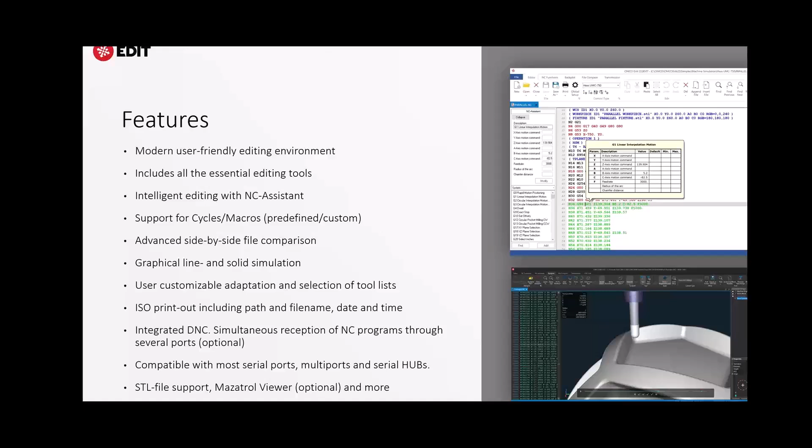Some of the new and improved features that have happened over the last couple of releases, and then the 24 release. Again, quite a large list here, but some of the key things: support for Mill-Turn C+Y axis functionality. You have the ability to download some machines if you're looking at getting into the machine sim aspect. Quite a few new and improved features in there.

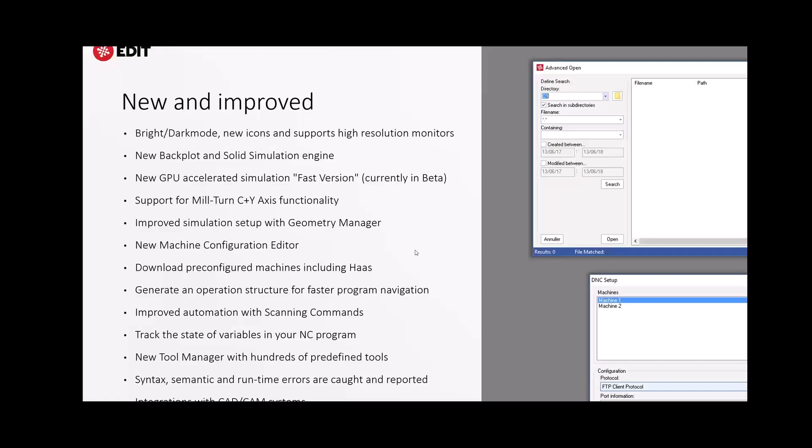Just wanted to touch on machine simulation. I guess before I get into this too far, this is obviously something you can do with CIMCO Edit, but CIMCO Edit by itself is essentially the stepping stone or the backbone of everything to do with CIMCO. If you're a customer already utilizing CIMCO DNC as an example, you would have CIMCO Edit. So if I was to liken it to an example, it would be like Mastercam Design. Mastercam Design comes with everything. It's the backbone. If you have Mastercam Mill, you have Mastercam Design. So CIMCO Edit works like that. Everything is built on top of it. The DNC utilizes CIMCO Edit and the CIMCO Edit interface, and DNC runs through that. Same thing with NC Base and MDM. Everything is built off of the CIMCO Edit Pro.

So one of the things Andre is going to dive into here is the ability to do machine simulation. He'll touch on that. There's an option to do the CIMCO machine simulation with NCI and also with G-code.

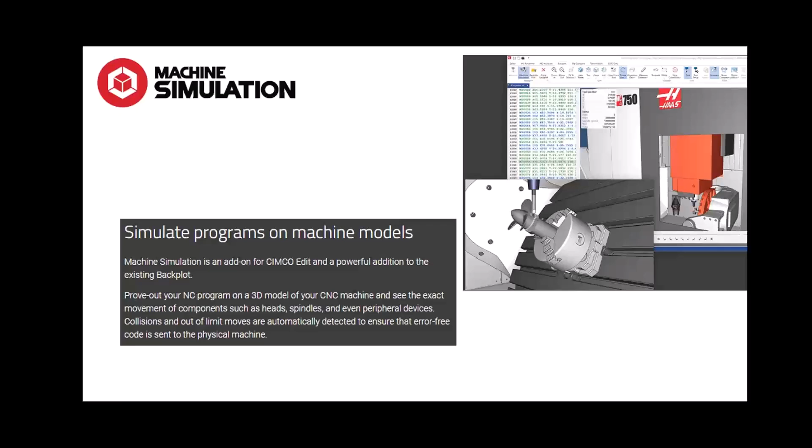The last thing Andre is going to touch on is CIMCO Edit Verify. One way to explain it is it's like Verify that you're used to in Mastercam, but it's outside of it. It runs inside of its own little standalone. If you've got really in-depth programs with lots of operations, CIMCO Verify can move pretty quickly, and Andre will have an example of that. The example on the screen is an 8-cavity mold, quite in-depth, and you can verify this to completion in, say, 5 to 10 seconds, where Mastercam can sometimes take a little longer. You still get the same result. So depending on your requirements, CIMCO Edit Verify might be of interest.

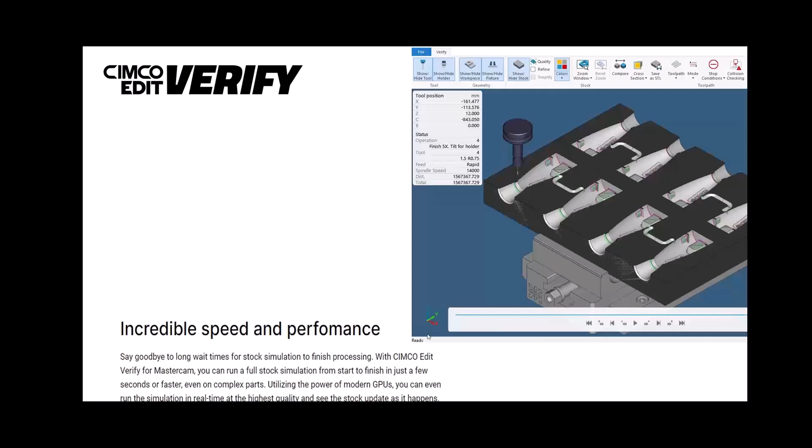There we go. Can you confirm you're seeing my CIMCO Edit 2022 screen right now? Yes, I see it, you're looking good. All right, great. For all of you guys that already use CIMCO Edit as your editor of choice when generating code from Mastercam, you'll be familiar with this. I'm using the dark theme or dark mode here, but as you can see, those are the exact same tabs you currently have.

So there's only the editor, NC function, file compare, and the regular single machine transmission that you can have in here. Now I'm going to close this up and start the CIMCO Edit Pro version. You'll notice I'm running the 2024 version, and you'll notice a few more tabs on top. As Lee mentioned earlier, the database tab is part of the NC Base integration with CIMCO Edit, which is an NC file database.

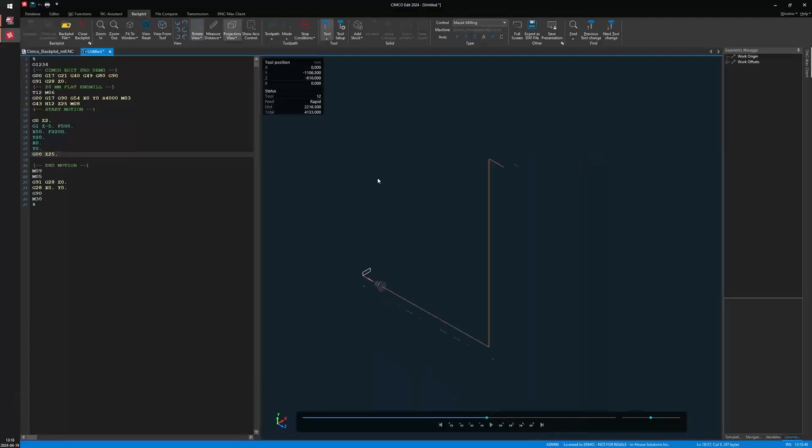From the backplot screen here, I'll be able to just pick what kind of controller or machine I'm dealing with. So I'm going to pull up this horizontal machine, and I'm just going to look at the backplot right now. So I have, well, it made it horizontal anyway.

So I have this simulation here that I can have going. I can step through it manually, or I can just run it from here with the control, and it's looking at the G-code simulation, as you can see.

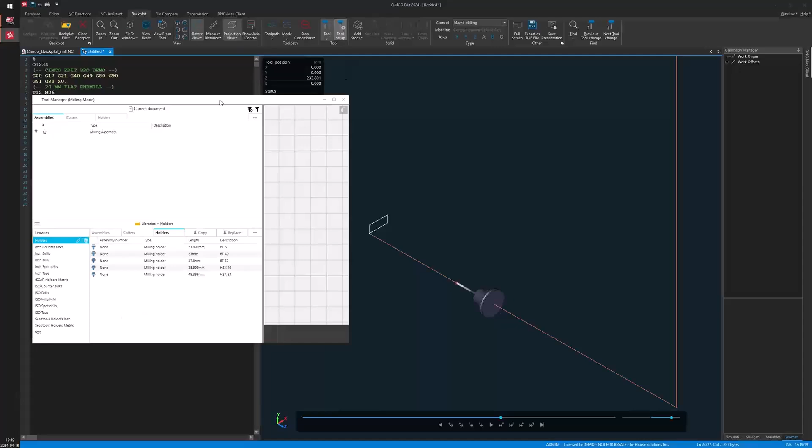You also have the option to define your own tool libraries within the CIMCO Edit interface. There's a nice screen here where you can define either your holder or your cutters. So this is just the holder, and you can have your different cutters, then create some assemblies as well for both milling and turning tools if needed.

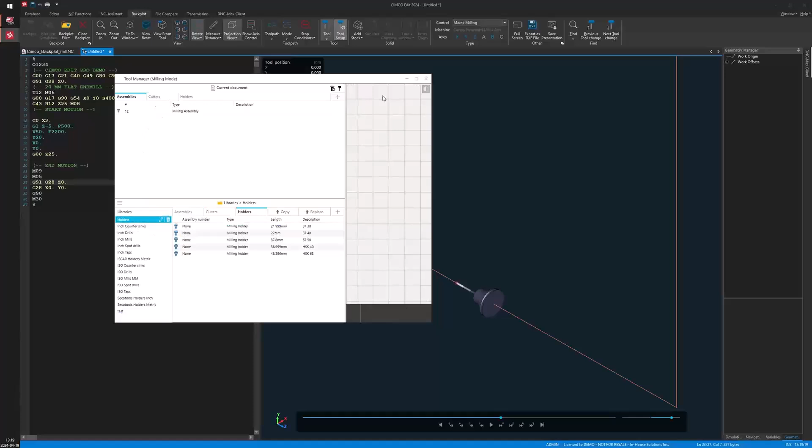Other things that are really interesting, for example, within the NC function: the ones you currently have in the OEM or Mastercam embedded CIMCO version stop right here. You have the options for adding or removing block numbers, adding spaces, and stuff like that.

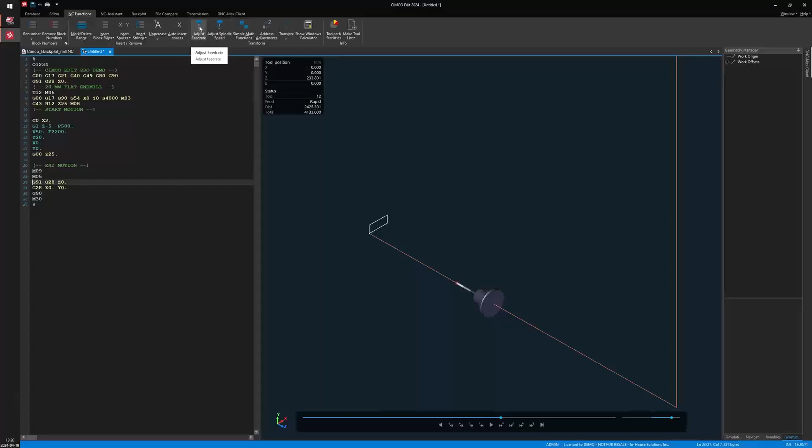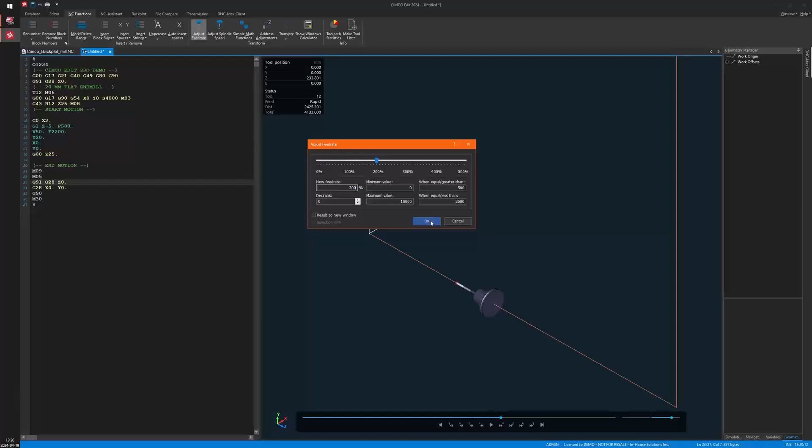But you have all these new features in the Pro version which allow you to modify feed rate. So you can say, well, if the feed rate is greater than 500, put it... adjust these values when it's less than 2500, increase it by 200%. So if I say OK, it should increase both my values 2 times, and this will reflect right away in the simulation as well.

Other things we can do here: we can do the same thing with the spindle speed, and we can add simple math functions.

So you can say, for example, take all the X values and add 25 to it. So you can just say, okay, I add 25 to all the X values. I had 25, I add 25, I'm now at X50. So it just increased it on this one.

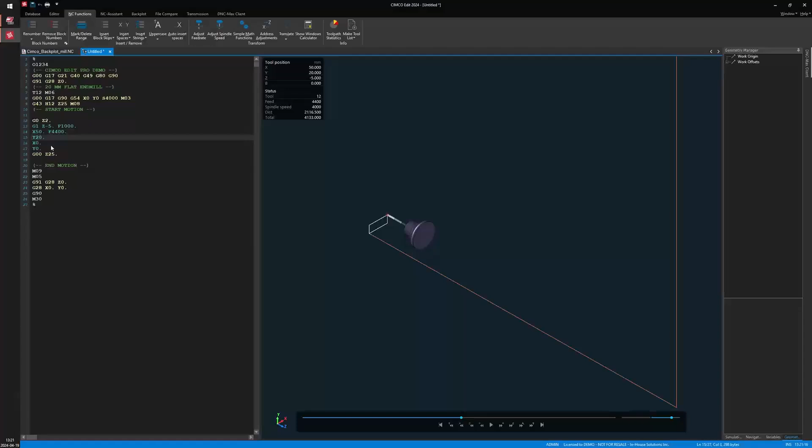Something else that you can do, you can flip values. So you can say, for example, I want this rectangle to be rotated 90 degrees. I can say swap X for Y's, and then just say okay. Now it's all flipped throughout the whole file. So it's just simple stuff that we can do.

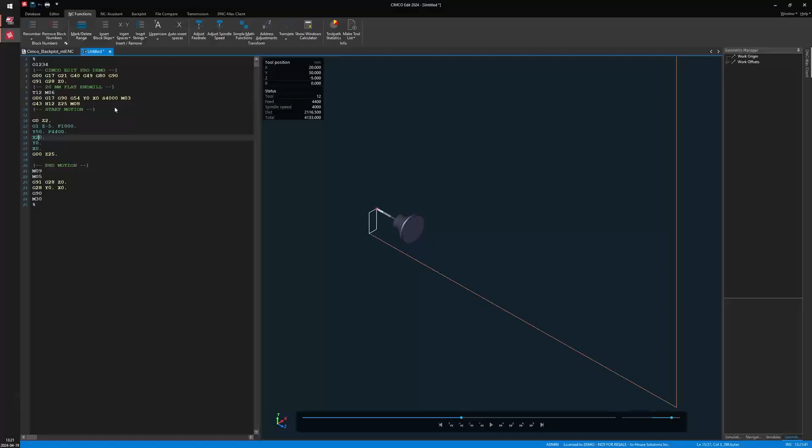We can also make some translations. So I could say shift everything here by 50 millimeters in X and 10 millimeters in Y. So now everything has been translated from my initial position.

This is just a shortcut to show the Windows calculator. So it's just gonna pop up on my other screen, for easy calculator access. You also have this toolpath statistic that is pretty interesting.

Well, maybe not on this file because it's so easy, but you can get the minimum and maximum Z values from the file, and then you get the estimated running time for all these operations. And you can also have it make a tool list.

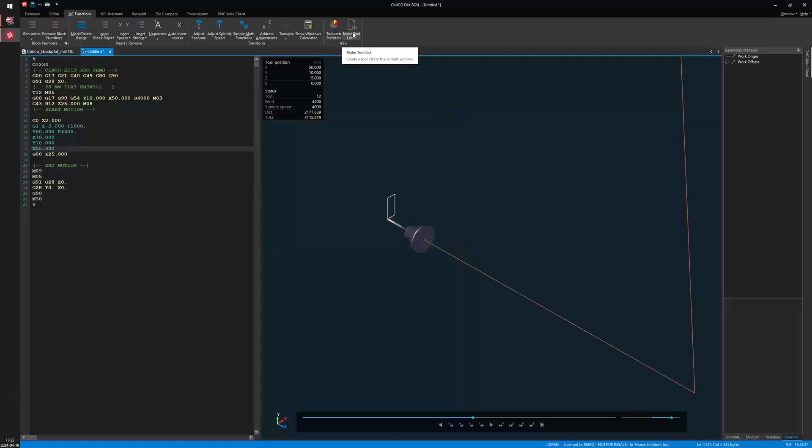So for example, if I go back to this file, which is a bit longer, if I make my toolpath statistic here, I'll get the information for all the tools individually, and I also have my tool list that can be extracted from the actual tool that we have here in the current file. So that's for the NC function option that we have here.

Let me just close this here. Something else that we can see from the NC Assistant page is the ability to set up what we call the multi-channel view. Whenever you have a machine that requires 2 different streams of code, whether they are embedded in the same file, for example, if you have a Mazak Integrex with upper and lower turret, these machines have M codes that specify whether you're working on the upper or lower turret, and they are embedded into the same file, but we can split them up and see how the process is going to be happening.

Or if you have them into separate files, like this one here, it's a sample from a Nakamura JX250, which has 3 turrets, so 1 B-axis head and 2 lower turrets. So what I want to do is just set this up, making sure I'm using the proper channel delimitation, so it's going to be using the M100-something with a P-value for the sync code.

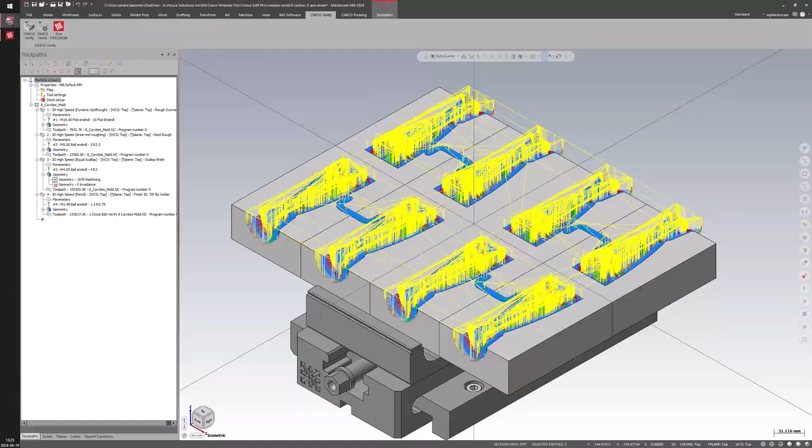So let's jump back now into a bit more advanced stuff. I'm gonna jump into Mastercam here and show you what CIMCO has called the CIMCO Verify or CIMCO Edit plugin. So this here is to show you the CIMCO Verify. That's the same picture that Lee had in the PowerPoint.

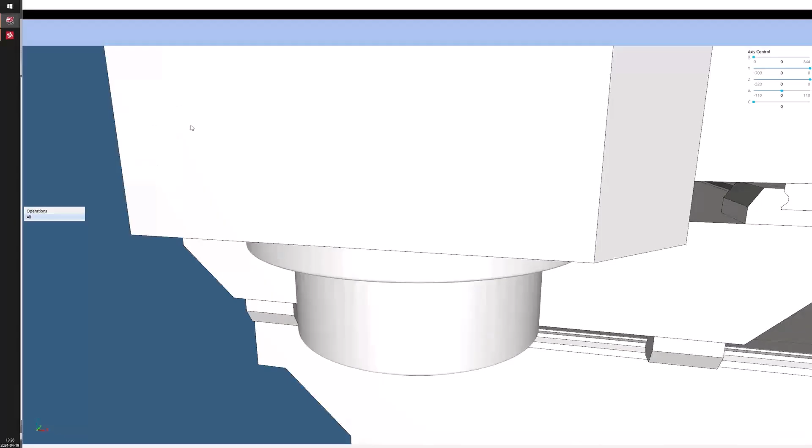So it's that 8-cavity file. Those of you who know Mastercam well enough know that if you look at those numbers here, those are the NCI file size for each of these operations. This is pretty heavy, there's a lot of points to generate the code and to simulate, and running that into Mastercam would take a really, really long time. But if we just go into CIMCO Verify, it's going to pop up in here, a dedicated interface.

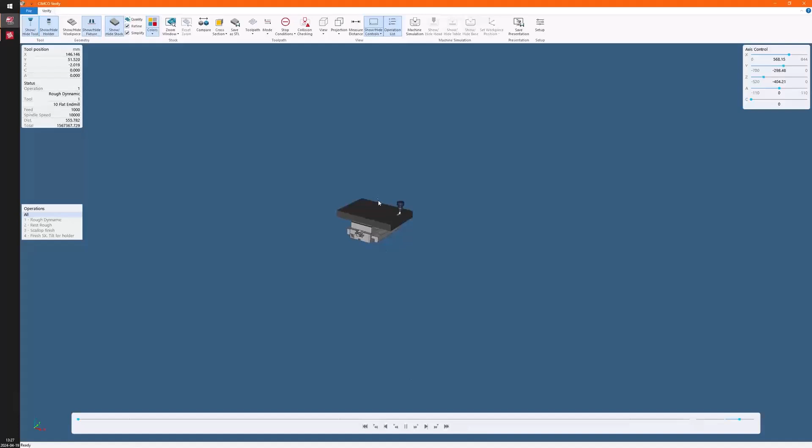We have this configured with the machine, so we don't have to run the machine simulation, but if we want, we can just turn it on or off and start the simulation. You have the regular play, but if you want, we can pause this and jump right to the end, and we're done. It's really fast, really clean.

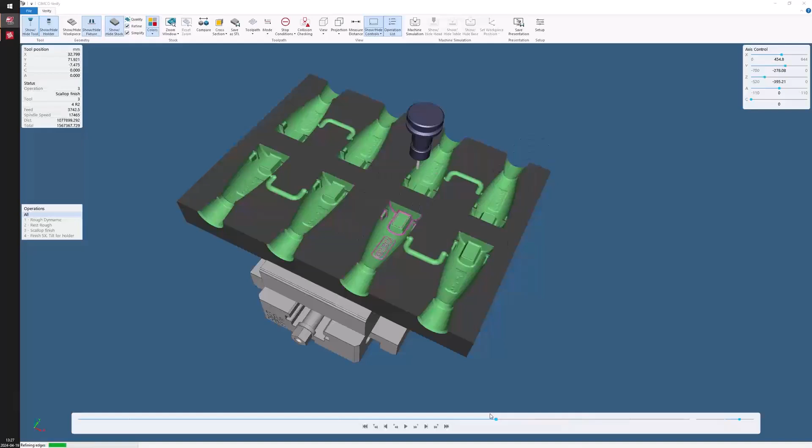What's also interesting is that I can scroll in and scroll back, and if I go back into a deeper stage of the operation, it will bring back material as I go. So I can go back and forth as long as I want, and it will bring back or remove material depending on which direction I'm going.

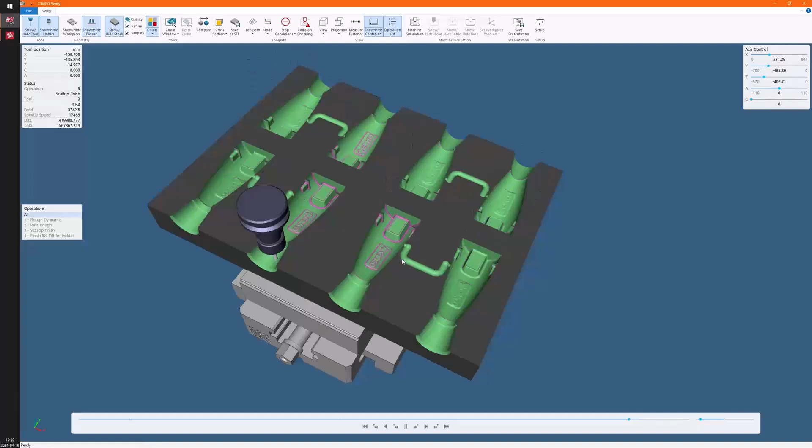You have the same option here. This is my simulation speed, but I can also go in reverse. So if I just set it to go reverse, you'll see material coming back in as we go. It's pretty interesting.

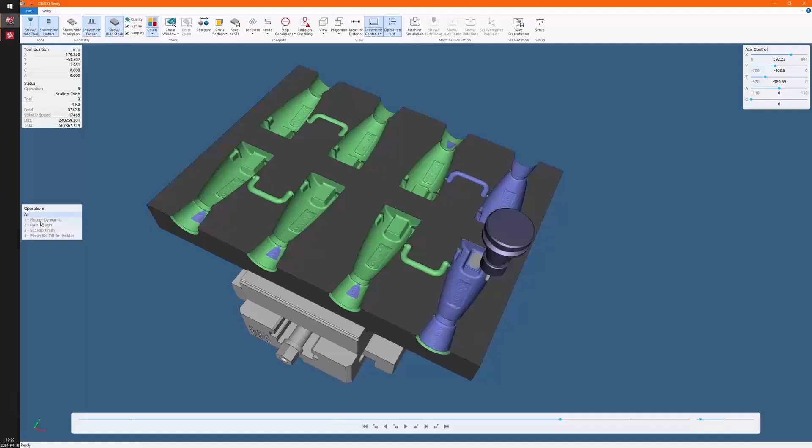Also, what's neat is you have these boxes of information showing the position of the tool, status of the operation, and some information gathered from Mastercam. But you also have this summary or list of operations, and you can jump right to the beginning of each one and see the result updating live, ready to run at that sequence.

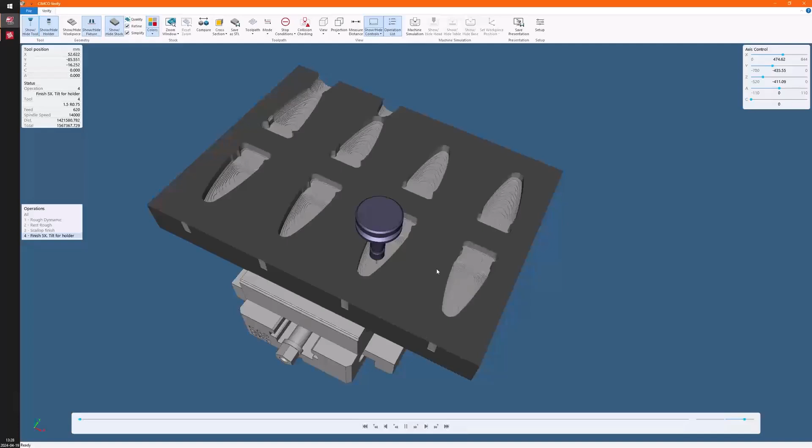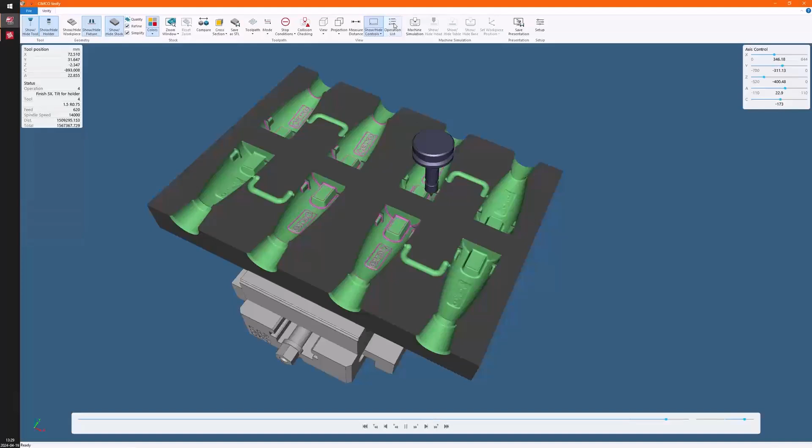It's ready to go, jumping in. Again, you have options to show or not show things like the tool and color coding, so you can control all of this. You can choose to see the operation list or not, and you have the axis control here which you can play with.

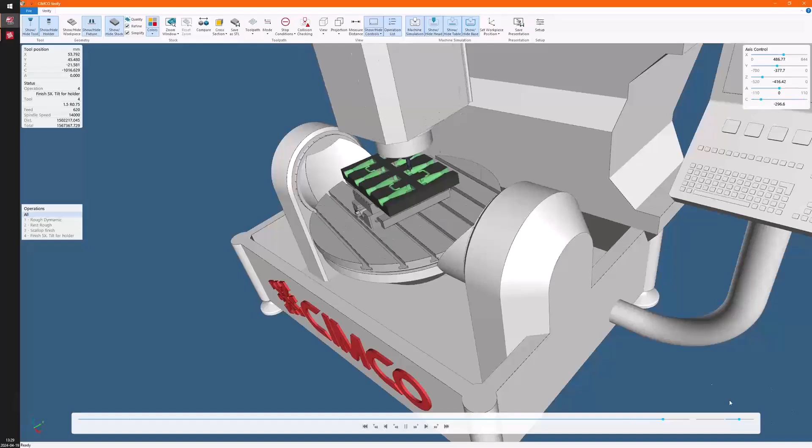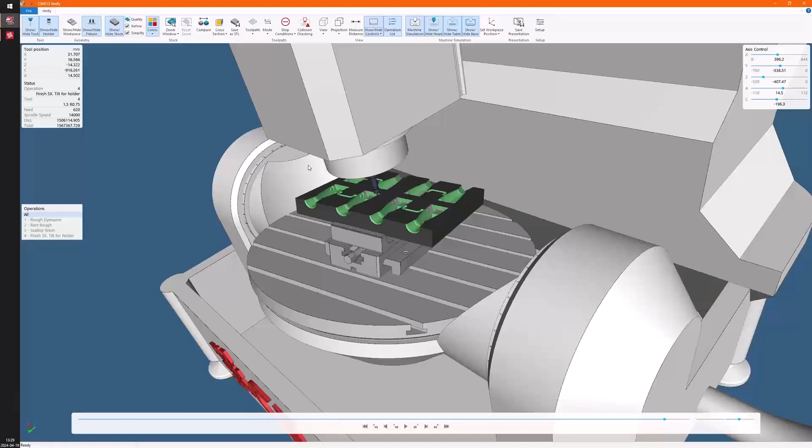If I'm running the simulation, going fast a bit on a 5-axis machining sequence, there you go. It's definitely much faster than what we have in Mastercam right now. So for huge files, mainly people doing intense 5-axis machining and mold makers as well, it's a pretty good, interesting option to consider.

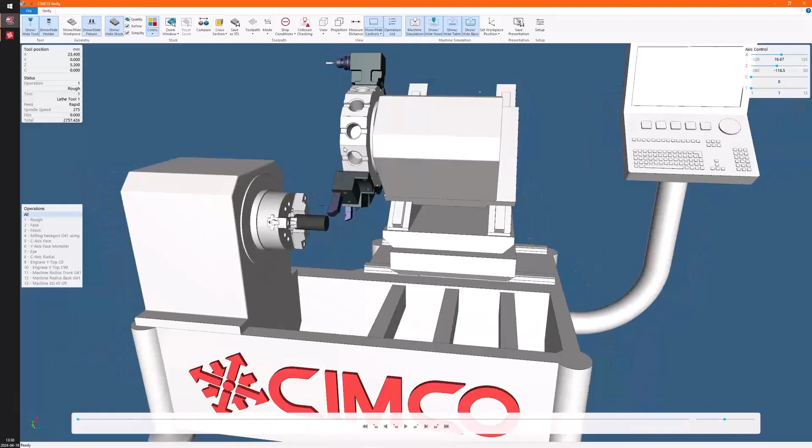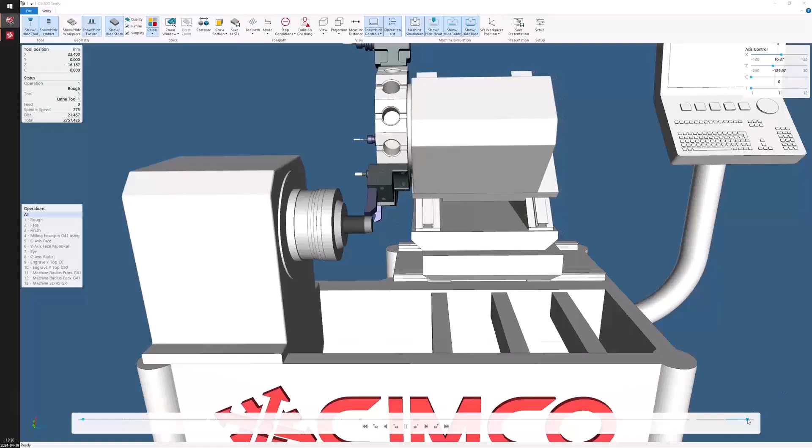If I turn this down right now, I'm going to look at a different file. So for example, I can pull this one out, just to let you know that CIMCO Verify and Machine Simulation also supports turning machines. It's going to extract the information from Mastercam. Regarding tooling, locators had been previously set in some part of the interface, but it's the same process as the milling. You'll see the simulation going on with milling, interpolation.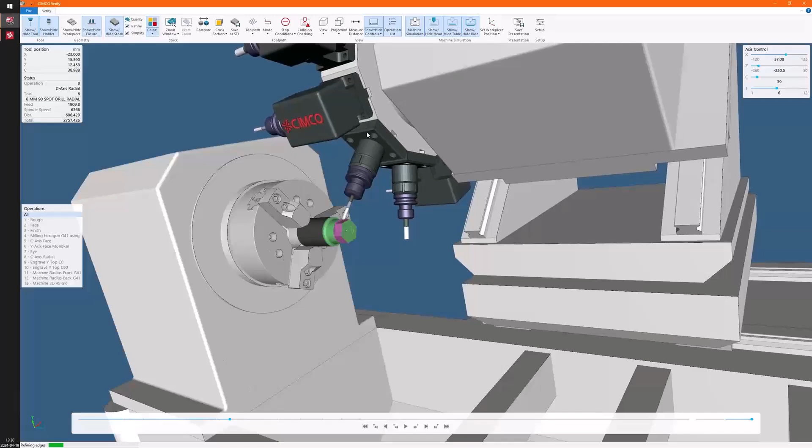Engraving, and the same feature as before - if I go back, I'll see material coming back on the part right away. So that's another feature of that.

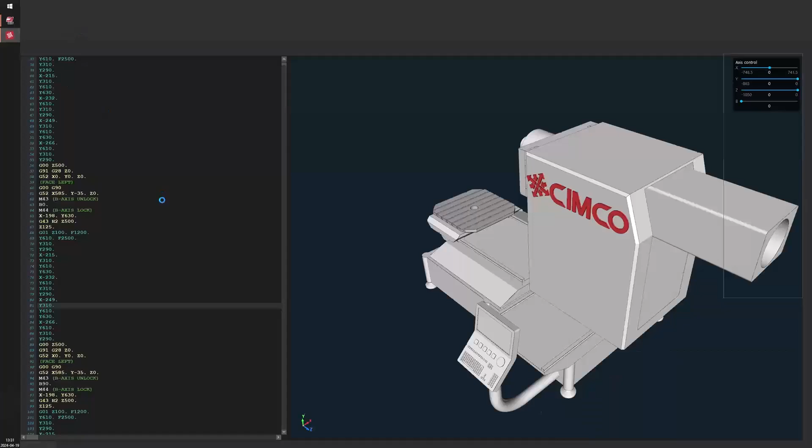Last sample I have here, using a different option from the plugin, is I'm going to run the CIMCO Edit. Just so we're clear, I'll show you this quickly - this is all good, so I'll turn it off and have that plugin run through. What this will do is automatically post the code with the Mastercam post we've selected, then launch the editor the same way as we'd normally do within regular Mastercam and standalone OEM version, but it will also launch the machine simulation or the backplot if I choose.

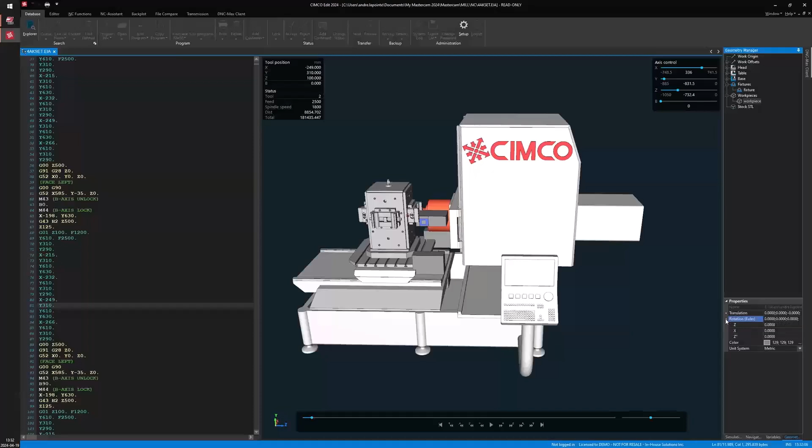Now what I have as an issue here - right now we can see it's being flipped because it's a horizontal machine, so I'm just going to flip this up by 90 degrees. This, flip the workpiece as well, and flip the stock to go along. There we go, and everything else.

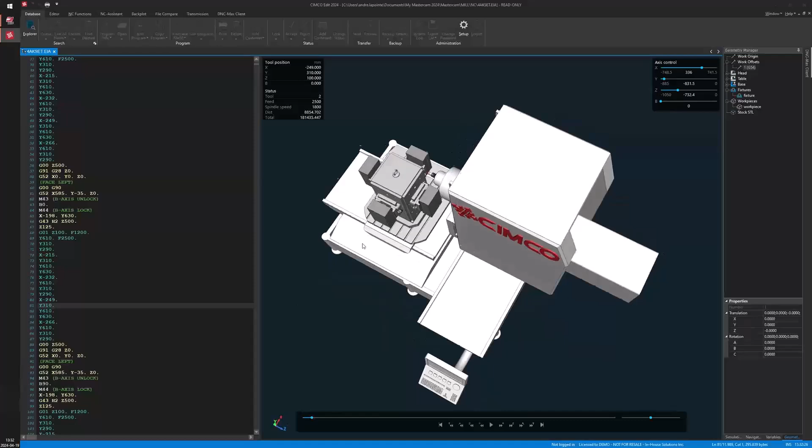You can see it track the G54, G55, and so on. So if I get back to the beginning and just let it go, now we're simulating the G-code as we go right now.

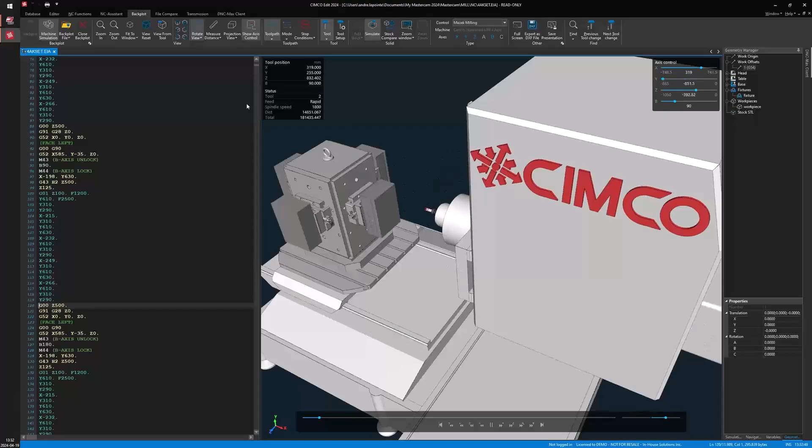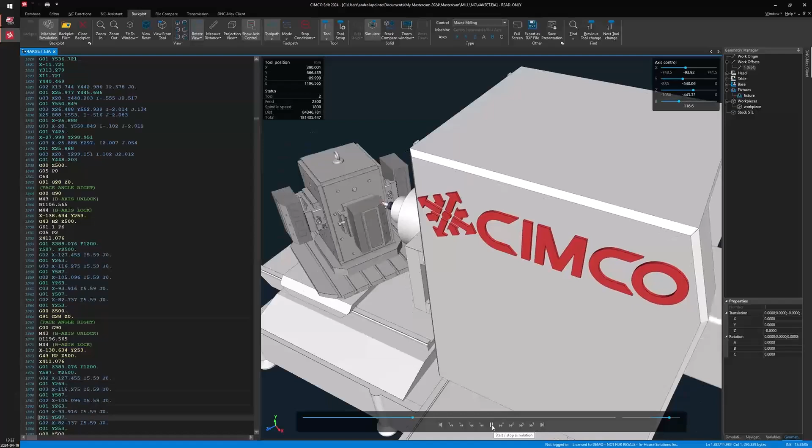Andre, just to quickly clarify, the CIMCO Verify is similar to the Mastercam backplot and Verify - it's using the NCI code, whereas now what you're showing is the CIMCO machine simulation, which is one step further and is actually simulating the machine utilizing the posted G-code.

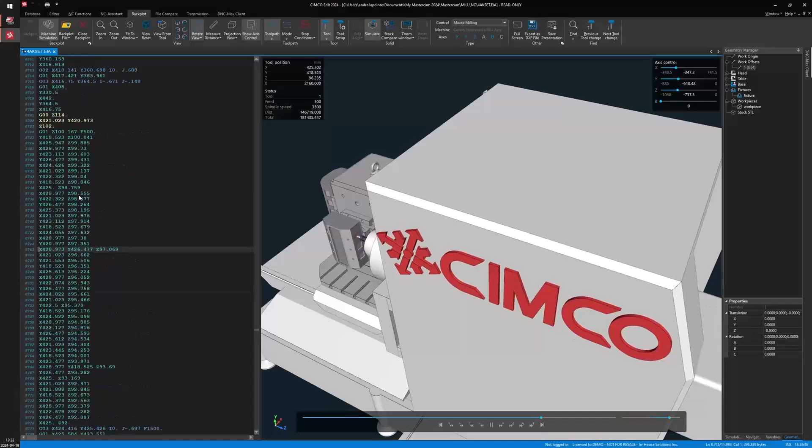Yes, correct. So this is using CIMCO's interpretation of the actual G-code that we see flying by on the left side, as opposed to the other screen I was in, which was the CIMCO verifier, which only simulates the same thing as the Mastercam verify, only faster. Perfect, thanks.

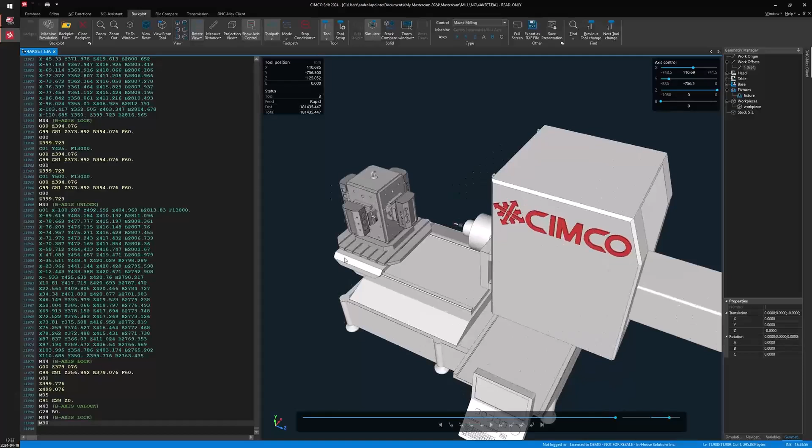Unless I'm mistaken, I think I've shown most of the things that I wanted to talk about. Lee, is there anything else you're thinking that you want me to talk about?

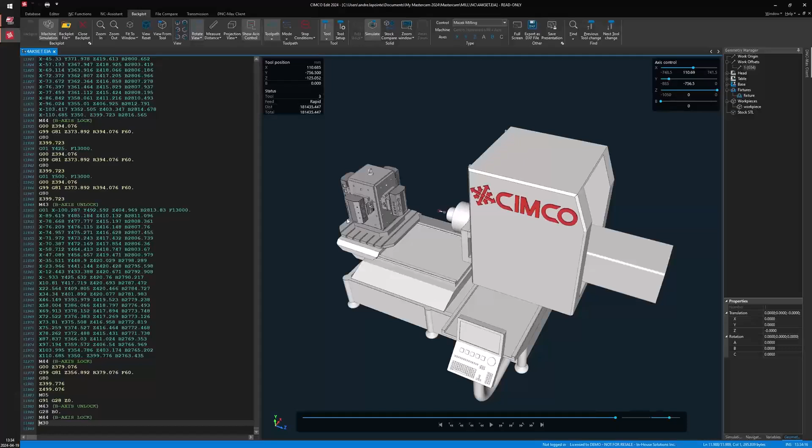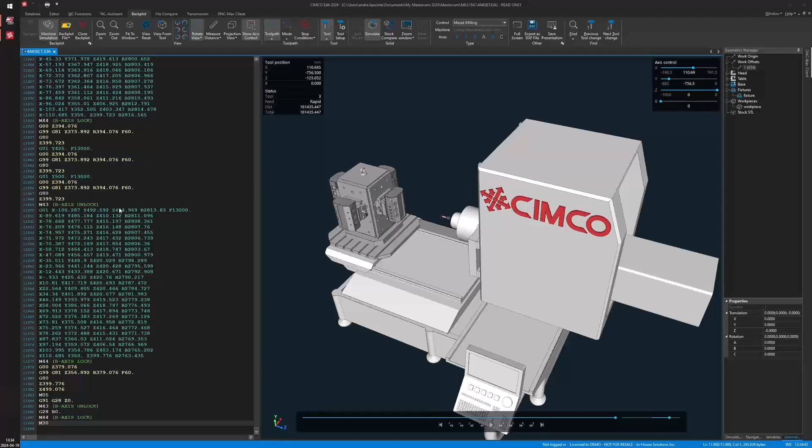No, I think that's good, that covers sort of the gist of everything. Obviously, if anybody has any questions, please feel free to type them in, or if you prefer, I can unmute you so you can put your hand up and ask a question. But I think it really covers it well. When you're doing something like a verification or simulation, the proof is in the pudding, so to speak. You're seeing it on the screen, so there's not too much more to it. But I think it just gives everybody a real good idea of what's out there, what's available, and where they could potentially utilize it or not.

Okay, so we have a question here from Chris saying, if I have a pro license, how do I get the plugin? So the plugin is available from the CIMCO Verify website.

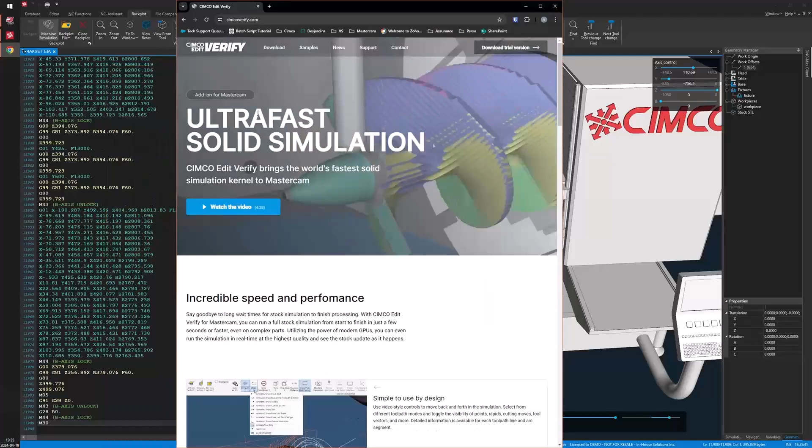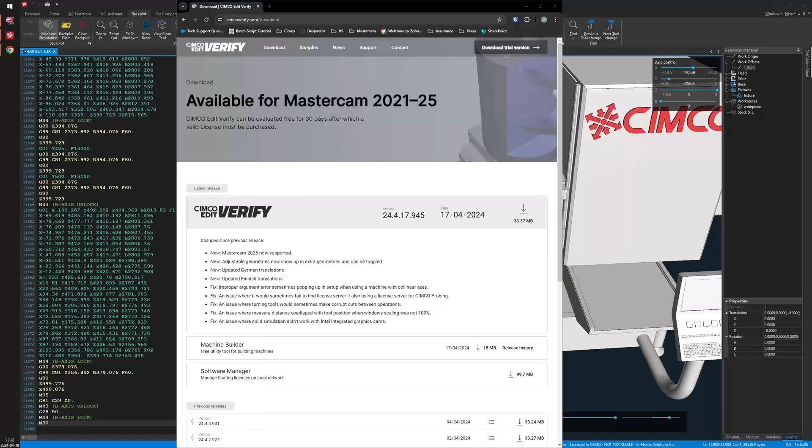Yeah, there's a 30-day trial available, and I believe you are correct, it is CIMCO Verify. I'll just quickly check to make sure. That's the web page here, so that's the CIMCO Verify. Then in the download, you have the whole CIMCO Verify stuff. But the other link, like within Mastercam, I would need to dig it out. You still have my download stuff. CIMCO Verify, no, I think that's the only thing. Yeah, that's the thing, you have the plugin, software manager.

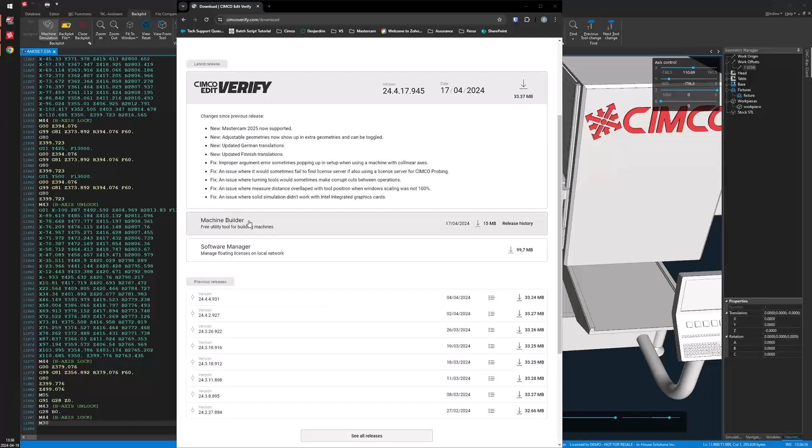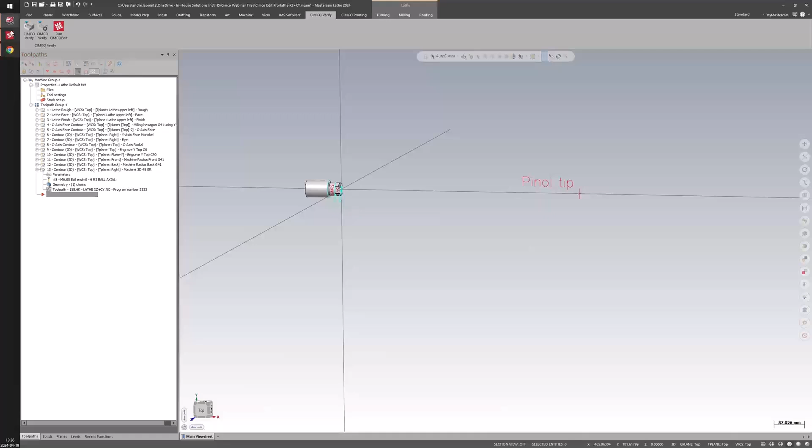No, that's all. The install itself, when you do install that, it creates the taskbar inside of Mastercam automatically. Yeah, exactly. But I thought the taskbar was also available just for CIMCO Edit. Oh no, they removed that. Yeah, that's it. Because back in the day, you had the option to run CIMCO Edit in there, and it would automatically post and open it up into CIMCO Edit instead of you having to post it and then set it up otherwise, so it was saving one step.

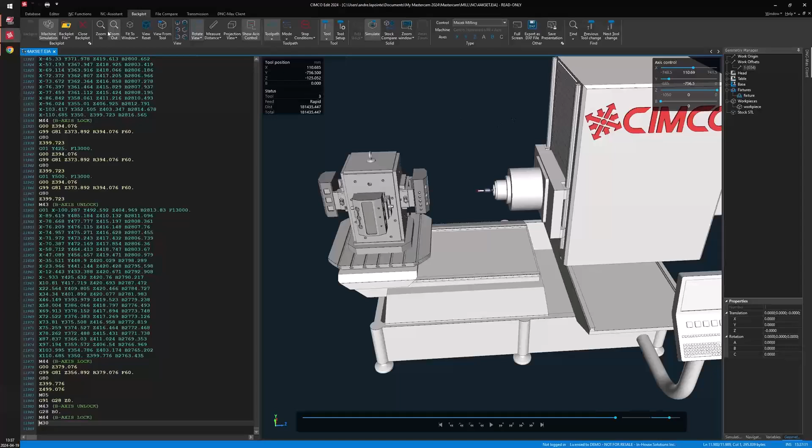The other question: how user-friendly is it to set up the machine simulation? So once you have this up and rolling, when you go into your CIMCO configuration - I'll just close this, open this up - the actual machine configuration is pretty straightforward. You have this tree-based structure here, so you just basically add either geometry, a rotary axis, spindles, or whatever you need to add in there. And then you can link up STLs of your 3D models, set up your limits, your feed rate limits, center of rotation, and so on.

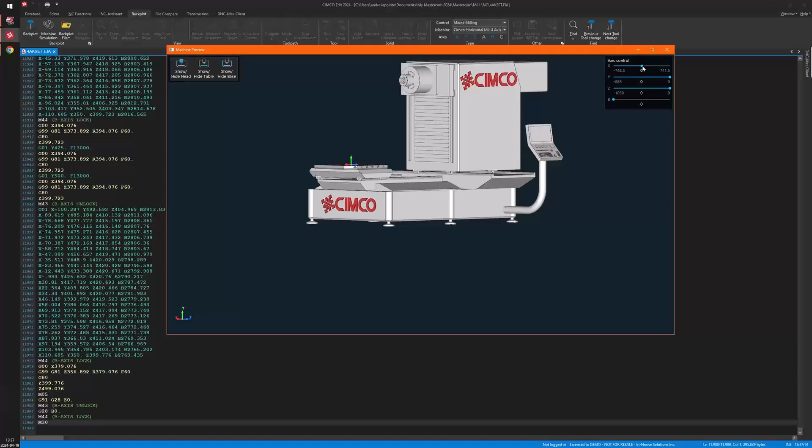And then you get to preview the actual machine. It's going to pop up in a different screen here, and then you can jog the axis and see if you've done things right or not.

You will also have some control based on the control type, so there's an extensive list here. You have options going from Fagor, Fanuc, Haas, Mazak, Heidenhain, Siemens, Mitsubishi, Okuma, along with all the other legacy controllers that we used to have in there. For each of those different controllers, you have a few control settings that will impact the way the simulation is going to occur. So if I go here, for example, for Okuma, I'll have different options than what I had for Fanuc, and so on. So you have different settings here. Those are basically the only settings that you can play with in terms of NC file interpretation, but you have full access to the actual machine building stuff - you can create the machine you want. It's not fairly complicated, it's pretty similar to most of the other machine simulation packages that you can find.

There's a few machines, Andre, as far as the machine models go, that CIMCO comes sort of pre-installed with, if you could touch on that. Yes, but the main thing, the key thing with setting up machine sim, obviously, is having the models first and foremost. Haas models are readily available on the web, the internet, so that's why you'll see Haas models available.

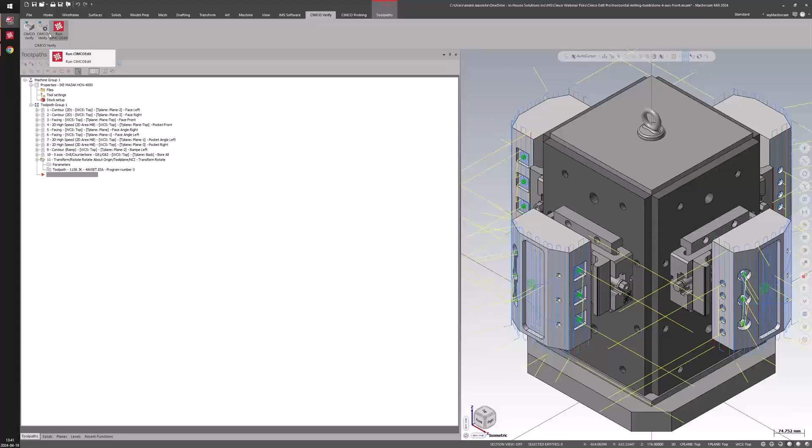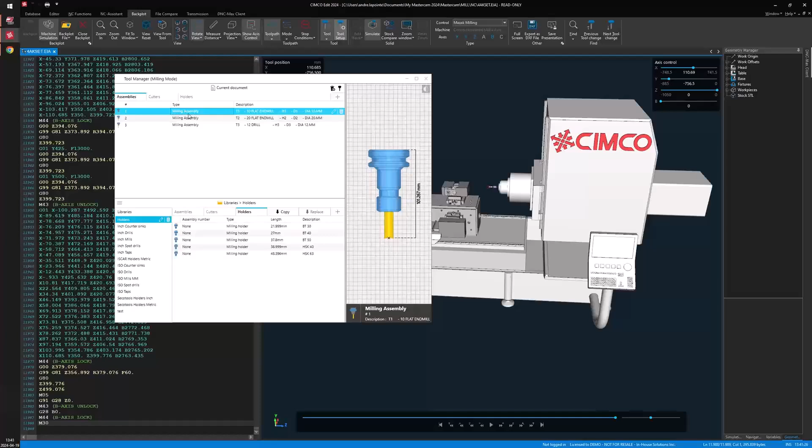As for Greg's question about the Mastercam tool, they will be imported automatically if you use the plugin. If you're using the CIMCO Verify add-on and run the CIMCO Edit option with the machine sim, it will automatically load the tool you defined within Mastercam, with description and all needed information. But if you're not going through the plugin, you'll have to define your tool yourself within the CIMCO Edit interface.

Do you have any videos or tutorials on how to set up the machines? Not yet, not that I know of, but that may be something we can look forward to if there's high enough demand. Maybe there could be documents on CIMCO's website, but I'm not aware of any since CIMCO offers it as a service to set it up. There may be some documentation within the machine sim itself, though I don't know if there's a help menu that dives into it. We can let you know, Chris.

Any improvements done on tool statistics in the Pro version? I was wondering what kind of improvement you're referring to or looking for.

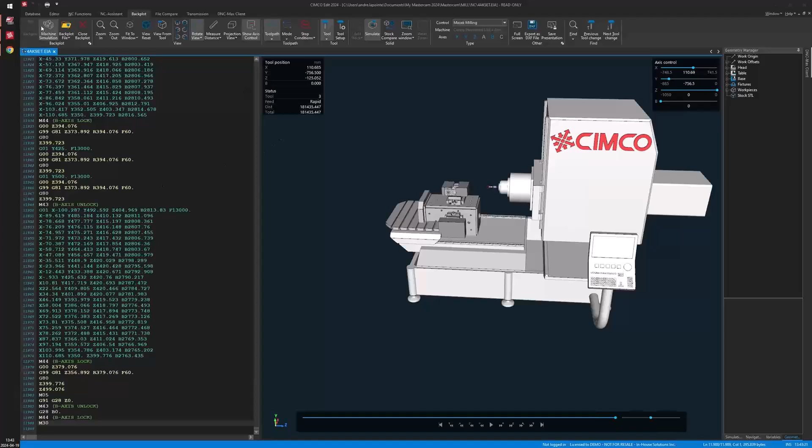Tool change time is in seconds, and tool setup to find part cycle time. We use it, yeah, the tool change time is in seconds. You'll need to time out your actual tool change sequence to see how long it's going to take. It's approximate—if you have a swing arm type tool changer, it's usually pretty accurate because the tool is already prepared before the change. If you have an umbrella type, it's more like rounding off the time it's going to take. It's usually always in seconds, but there's not much more to it. Whenever you set that up, it considers tool change information like feed rate, but there's no option to set acceleration or deceleration.

No, I don't see anything about that. Custom macros to edit?

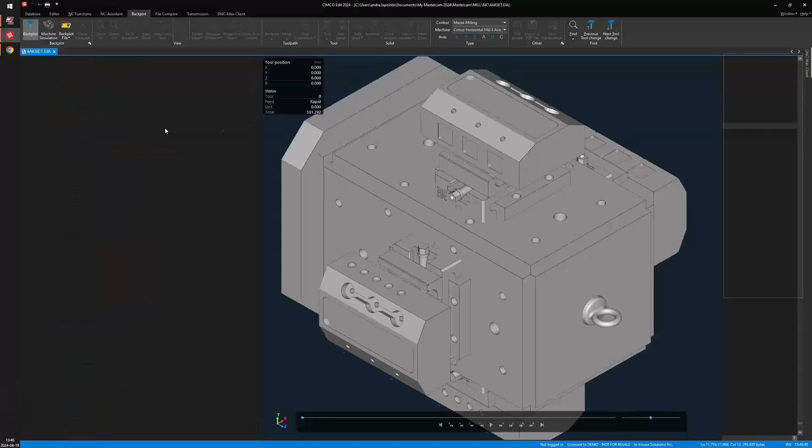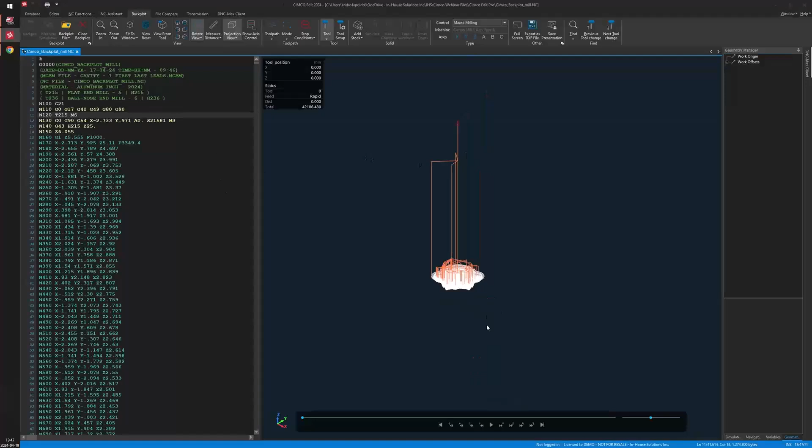So if I go back to my backplot tab, I want to simulate that. I'll just open up another file, not this one—here, that's my file. I have this small file here, done on a 3-axis, and I have my simulation going.

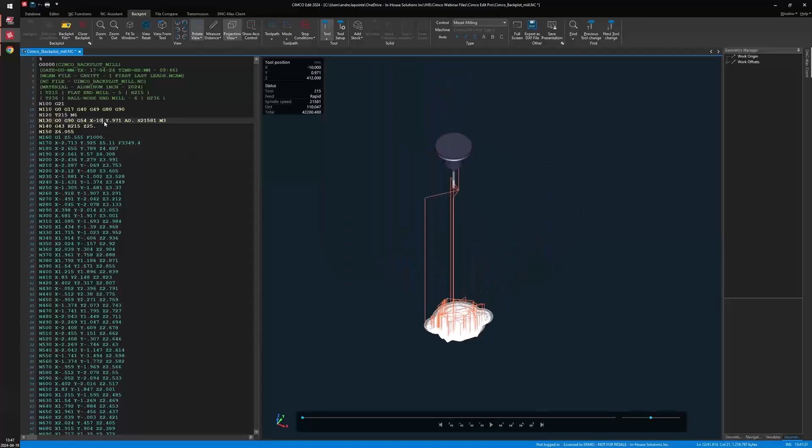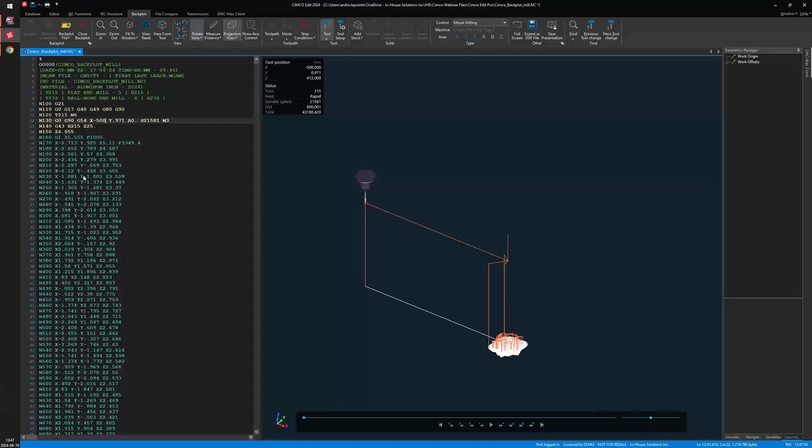So anywhere in here I can say I want to change my start point, or change anything. Let's put a really big number so we can see the difference, so I can see right away my tool—oh, I'm in metric, guess what, let's put 500. Remove the enter here so you can see it's live right away. It's always looking at the current code, so it's fast and intuitive in how it works. It also color codes automatically—yes, Chris, hold on a second.

Okay, you are unmuted, but I think you are also self-muted. Yeah, he's self-muted.

I think the key thing with Chris's question is sort of CIMCO Edit as a base. We've shown what it can do, the backplot, the functionality, all as a whole, one thing. Then we've shown CIMCO Edit with Verify, and CIMCO Edit with Machine Sim. So we've shown three different things, but CIMCO Edit as a base point is, from everything I've understood in the industry and even other CAM softwares, they all have some form of CIMCO OEM or light version embedded. It's sort of the industry standard, if you will. But if we were comparing it, that might be a good question, Chris.

If you're comparing it to other editors, what other editors might you be talking about? Potentially the Mastercam one, things like that.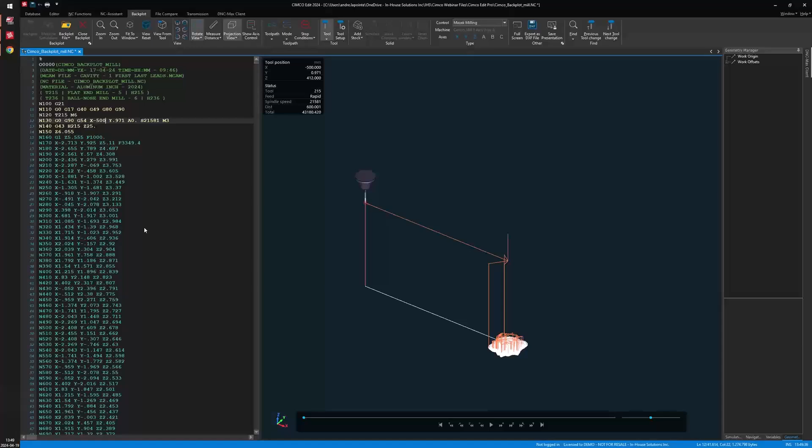Yeah, I've used Predator before, and I found it quite good, but that was quite some time ago. Yes, I myself don't have any familiarity with Predator. I don't know, Andre, if you have, but I think it's been a while.

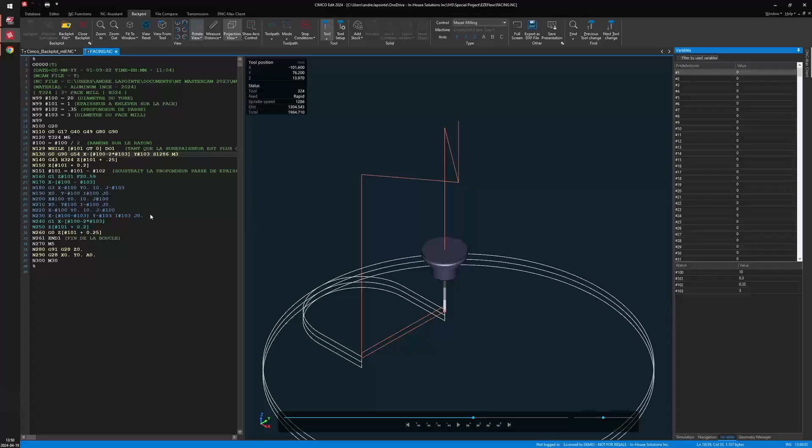I think in this situation we can only show what we've got and the tools that we use. I think most folks are either using the onboard Mastercam editor or the OEM CIMCO that comes with it. But was there something specific you were looking for, Chris? Maybe something you remember from Predator.

Are you able to show a DNC on more than two machines at once? Not well. You are able to send a program to multiple machines, but only one at a time with CIMCO Edit. So my memory says that Predator would do two at least at the same time.

Yeah, we can do that, but with the DNC Max package. That would be CIMCO DNC, which again would be the editor, and then you've got the DNC added onto it. So it's quite possible that the company you were at before with Predator had a full Predator DNC solution. Okay, so I'm getting ahead of you.

That's a later lesson. Yes, actually that's in two weeks. Yeah, exactly, that is the next one for sure. And if you join us, you'll see everything Andre is going to show in DNC is going to be this exact same interface, and then it's just going to be that DNC tab aspect.

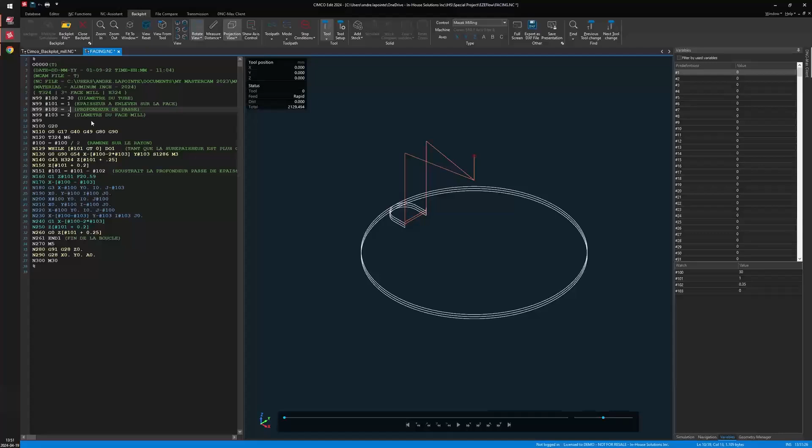And DNC is a lot more, obviously. If you're doing two or more machines, or if you have the need to be sending and receiving to multiple machines, that's when you start to look at DNC as the next level option above what CIMCO Edit can do. Even with the CIMCO OEM version, you can set up several machines from a transmission standpoint, but it kind of limits out there.

Yes, with the DNC, that's when you can start doing so much more too. You can be doing remote requests, so the operator at the machine can type in a code and actually pull that program down with no interaction with the programming department. No need to walk to a central computer, get your control ready, walk over, send it, do all those sorts of things - that's the next level with DNC. And of course, drip feeding 10, 20 lines at a time, if that's a requirement, things like that. Okay, I'll reserve that for the later webinar, and we'll cross that bridge when it comes.